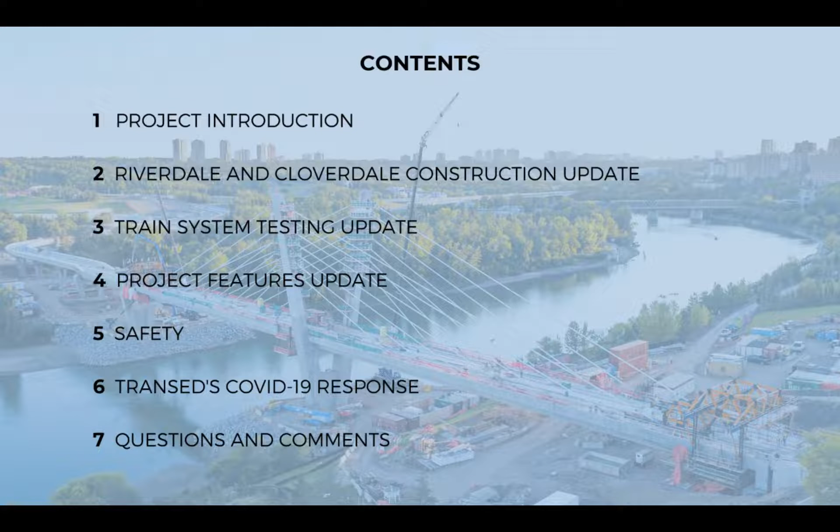The contents of today's presentation: a brief introduction of the project, then we'll focus in on the Riverdale and Cloverdale construction updates in and around those neighborhoods. We'll take you through some train system updates, which Eric will lead, and then I'll walk you through a number of other project features along the entire alignment of the LRT. We'll focus a bit on safety, how that impacts the public, as well as some of our COVID-19 response. As Isabel mentioned, you can submit questions throughout the presentation, and Eric and myself, along with some assistance from the city who's joining us today, will do our best to answer those questions. We do have representation from the city available to answer questions, and they are listening in today as well.

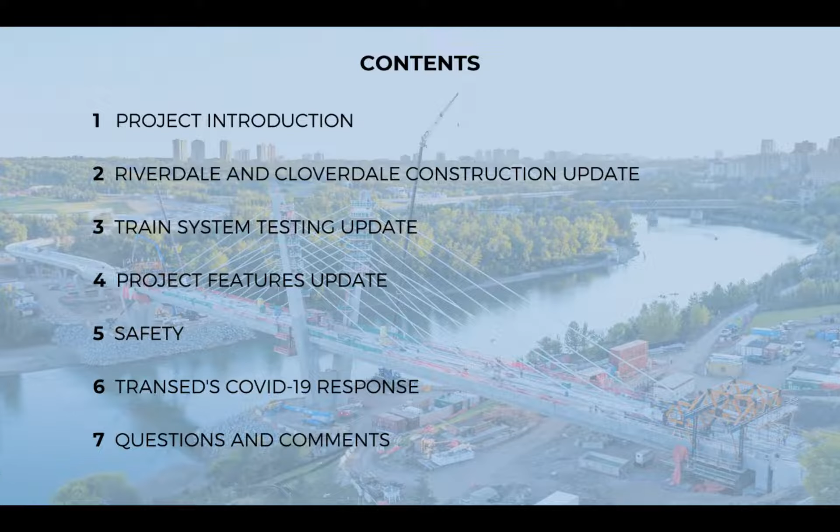So with that, we will move right into the project introduction. Before I do that, I want to talk a little bit about what you see on your screen right now - if you want to just go back, Isabel, for a second.

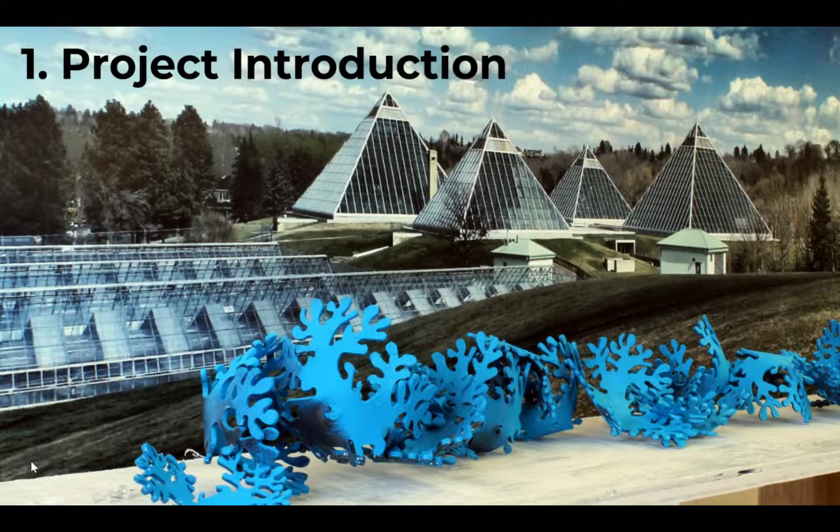This is some public art rendering from down in the Muttart area - artist work that's going to be mounted on top of the stop at the Muttart station, down at the bottom of Muttart Park basically. This art was created by Stephanie Johnson; she is doing botanically themed sculptures that will echo plants and flowers found at the Muttart Conservatory. What I find really interesting is that it was actually derived from imagery provided to her by members of the community who were in the Muttart - they created sketches of the different plants and species they saw inside, and she's taken those and used them to help influence the sculptures she's making. Really, really neat - it looks similar to this. I saw some recent photos of it today, and I can tell you it's very, very similar to what you see in the rendering here.

All right, now we'll move right into a couple updates and information pieces about what this Valley Line project is all about.

This is a public-private partnership, also known as a P3, the first of its kind for the city of Edmonton. It's the southeast portion, with another phase coming that'll take the line out to the west. This portion that TransEd is building is 13 kilometers long, taking us from downtown Edmonton all the way to Mill Woods, at about 66th Street and 28th Avenue. Along that route, there are 11 train stops, which we'll talk about in detail throughout the presentation. There's also one elevated, fairly significant station along the alignment, incorporated with a 1,300 stall park and ride, an ETS bus transit facility, taxi stations, kiss and ride, and other transit-oriented parking.

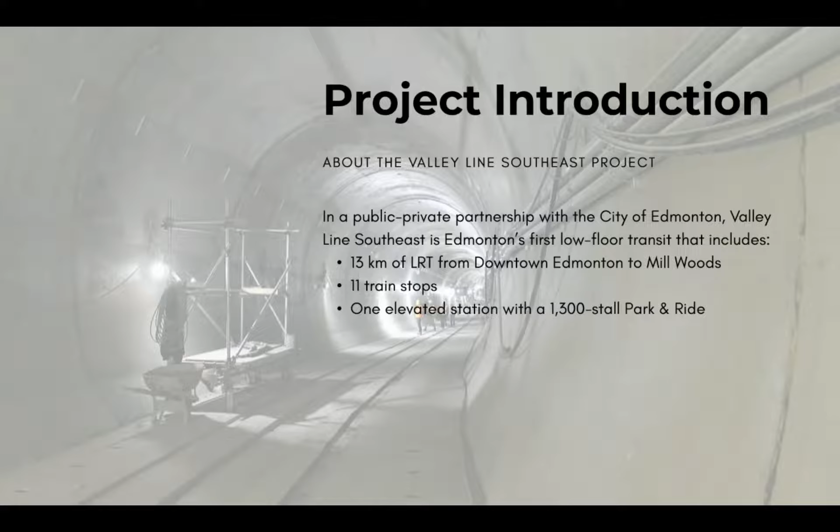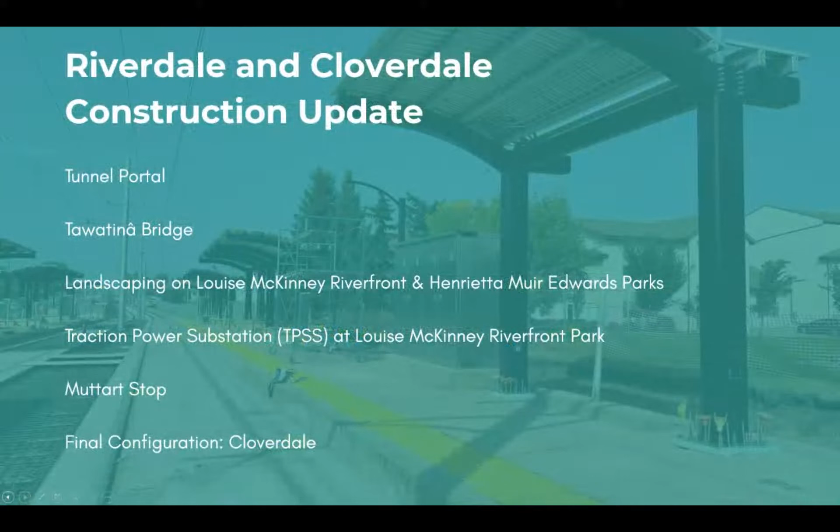Moving on, I'm going to dive right into the Riverdale and Cloverdale construction update. I know a lot of you have called in from that neighborhood, and we're really grateful for that. Some really good participation from that community. You've certainly broken the record for the number of people calling in today compared to some of the other areas we've had along the alignment, so we thank you for that.

Some of the things I'm going to cover here with some help from Eric is the tunnel portal. I'll talk a little about the Tawatinâ Bridge, which is the bridge crossing the river, and take you through some of the landscaping in Louise McKinney Riverfront and Henrietta Muir Edwards Parks. We'll talk about the traction power substation located on the North Riverbank, I'll give you some more details about the Muttart stop, and then show you a bit of the final configuration drawings to give you a big overview map of the area.

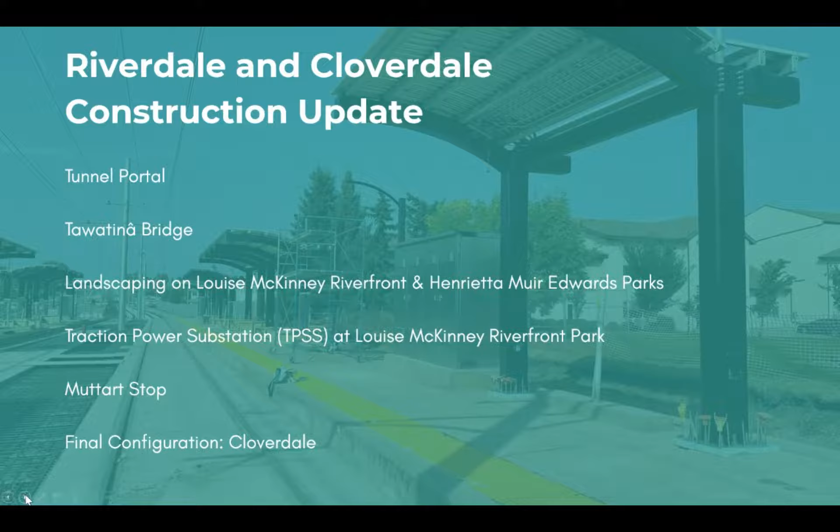All right, so what you're looking at right now is the tunnel portal. The big picture on the left is looking down the tunnel. This was taken at the very east end of 102nd Avenue, basically where it crosses Jasper Avenue. In fact, right above this photo is Jasper Avenue. You can see in this photo it's very close to completion.

Those devices wrapped in plastic along the outsides of the photo are actually the fans that help move air through the tunnels. You can see there are two, one for the inbound track and one for the outbound. In the bottom right photo, you can see a shot down the tunnel, where you can note that the track is being installed. There are conduits along the side, so a lot of the systems and cabling infrastructure is going into the tunnel right now as well, well underway. We're very close to completing the tunnel. In the top right photo, you can see the tracks coming out of the portal on the riverbank side, on the north riverbank of the river, just as it connects to the Tawatinâ Bridge. Fairly recent photograph, that one there as well.

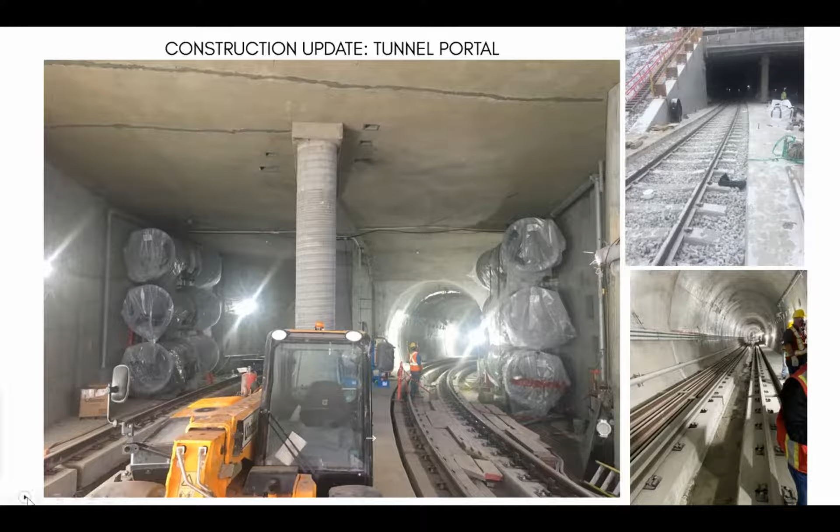Those concrete plinths are what actually carry the steel rail across the bridge. That work is actively ongoing right now. In fact, we'll finish that concrete work in the coming weeks, and then we'll move quickly into the rail installation. That allows us to begin putting up the overhead catenary system across the bridge, and you'll see that occurring through the winter.

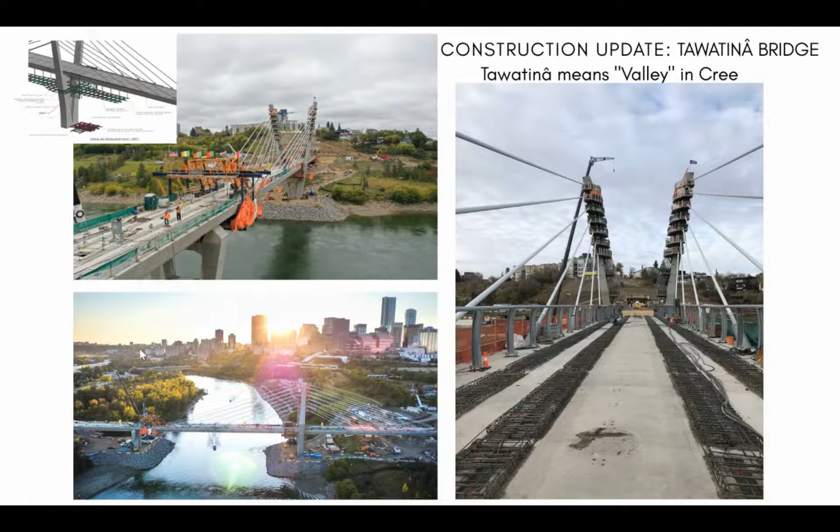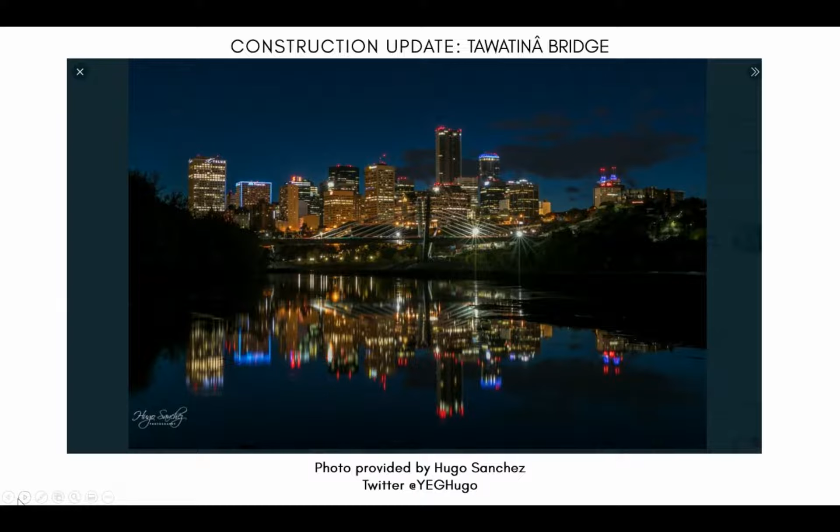All right, so let's talk a little bit more about the landscaping that's going to occur in the river valley. I know a lot of you are probably pretty interested in that. To start out with, on the Louise McKinney side, the north side, there are 42 different species of trees and shrubs that will be installed in that area, and 26 different kinds of roses, believe it or not. In total, about 2,855 plants are being installed in the landscaping areas of that side of the river.

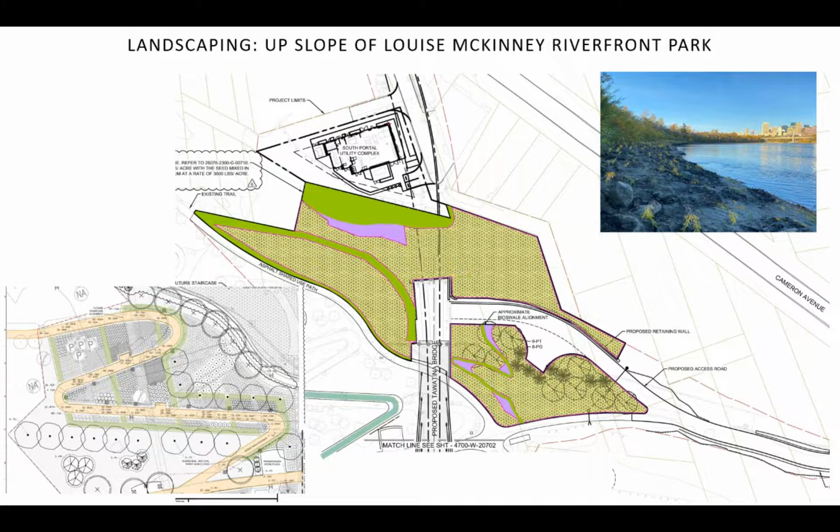We often get asked why we go so far down the river to do that work instead of just doing it where the bridge is. When you put a river berm into the river, there's a certain amount of disturbance to fish habitat and the riverbed at that location. As compensation, Alberta Environment requires contractors like ourselves to do an offsetting plan - additional planting back where the berm is, happening next spring, plus further areas to give an equivalent and more than equivalent footprint of reestablished fish habitat and biodiversity improvements. That work is ongoing right now and will continue next spring.

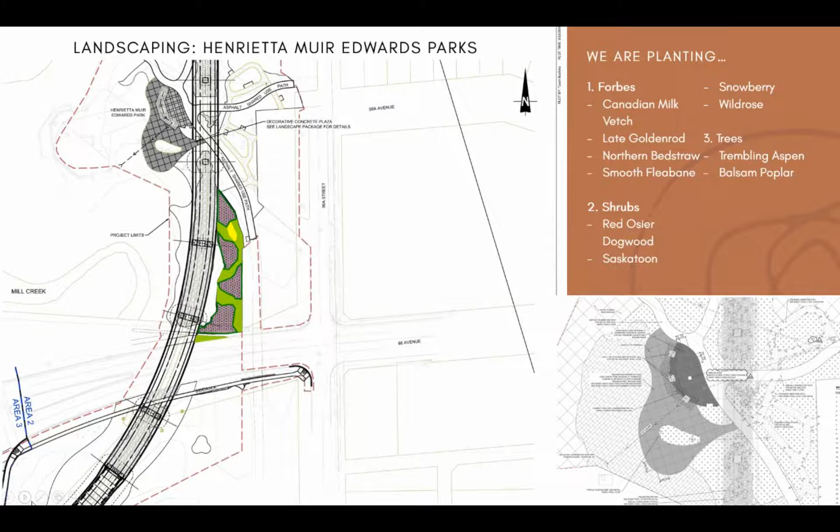Jumping to the other side of the river now, you can see a list of all the different forbs, shrubs and trees going into the Henrietta Muir side, the south side of the river. Not a lot different to speak about with the plants - take a look at the list, again many hundreds of plants get installed there. The parks will be reestablished, the trail system that was down there before will be put back into place, and the connections to the existing pedestrian bridge over 98th Avenue will be reconnected. All of that happens next spring as well.

I wanted to talk about one other topic before we move off this slide - the reforestation efforts for the entire project, specific to the river valley. Across the entire project there's just under 11,000 trees being planted, and 86,000 shrubs across the entire alignment. In areas of the river valley where forest was removed to complete our work, we have to restore that, so we have a very detailed reforestation plan reviewed by the city and the city's environmental professionals, and developed by environmental scientists and consultants on our side.

One unique aspect of that reforestation plan started a few years ago - we sent our crews out into the river valley to gather seeds, and we've been growing native plant seeds from the river valley for the last few seasons in greenhouses. Those are going to be transplanted from the greenhouses into the reforestation areas within the river valley, designed to mimic exactly what was there before. We're pretty proud of that effort.

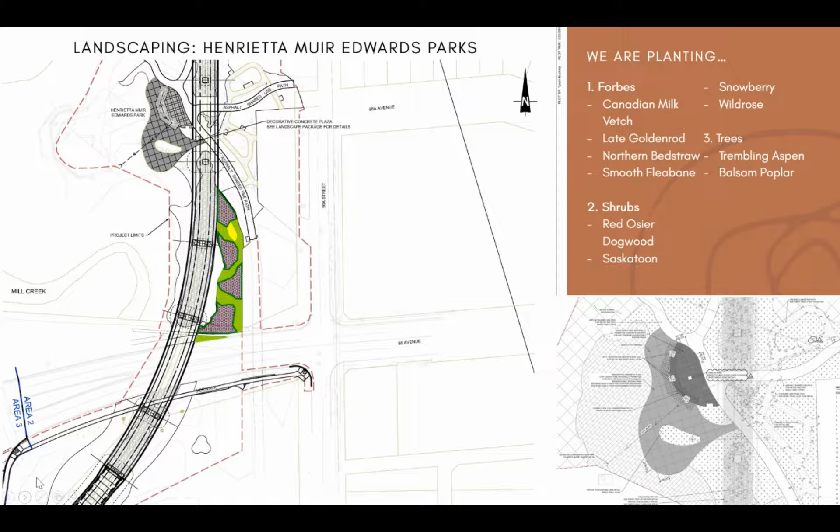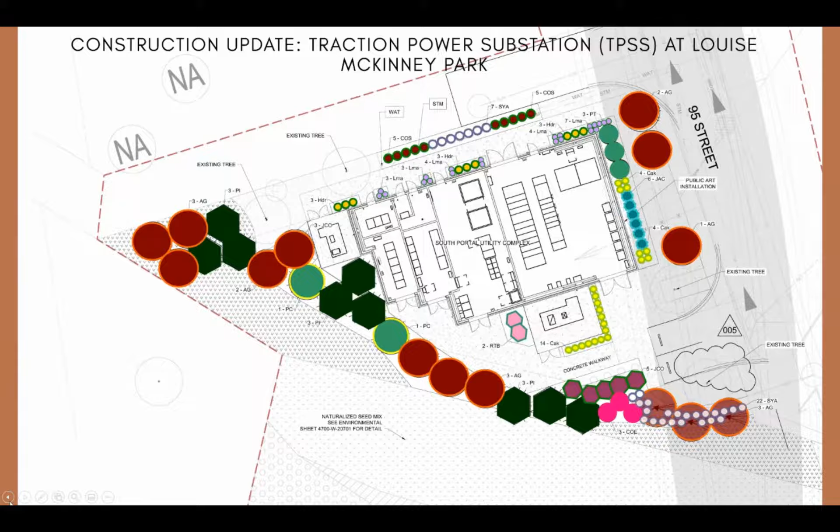All right, we can move on.

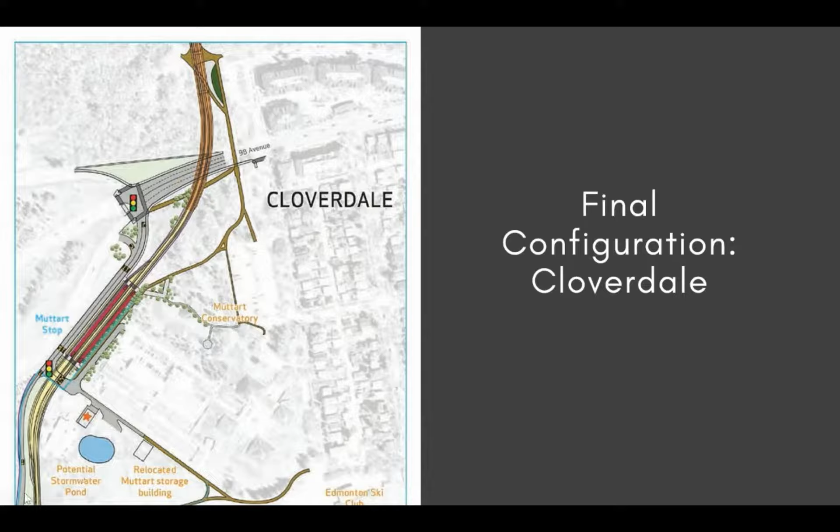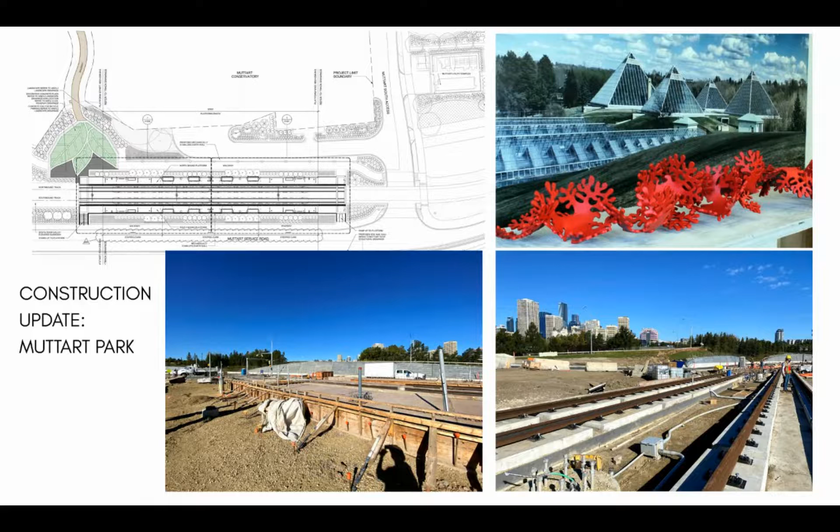All right, let's keep moving. I'm going to turn it over now to Eric to give you a little bit of an update on the train system testing.

Thank you, Dallas. So let's go to the next slide and dive right into it. I wanted to give everybody a view of what happens when the trains are actually delivered. Right now we've got more than half the fleet that's actually arrived in Edmonton - really, really proud about that. It's coming all the way from Kingston where they're built and tested.

It gets loaded in Kingston at the manufacturing facility, so it's being rolled on. Then after that, it gets trained all the way to Edmonton and to the main yard. After that, it gets transferred onto that truck, which is really a specialized truck to allow us to take the different curves and navigate the city streets.

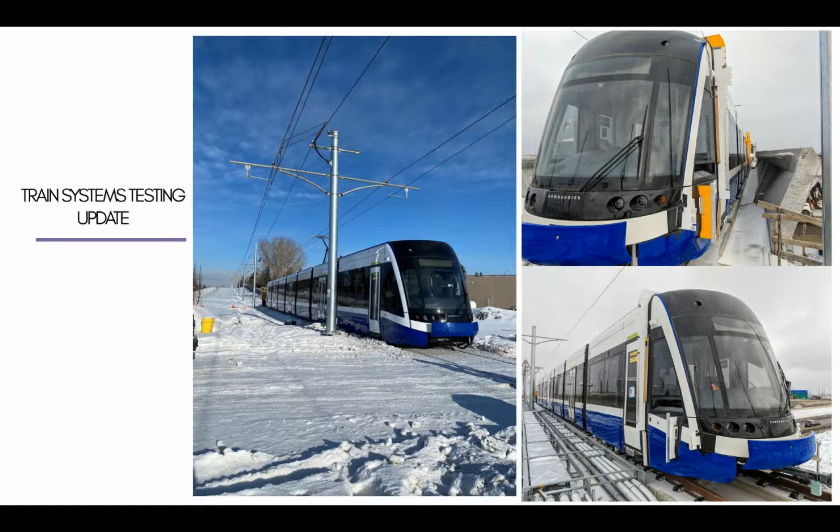Really, really interesting stuff. You should start seeing things in your area probably in the course of next year. For this year, we'll be operating in dynamic mode around 66th Street and the area of 38th and so on, and we'll make our way gradually down the alignment toward the city downtown core.

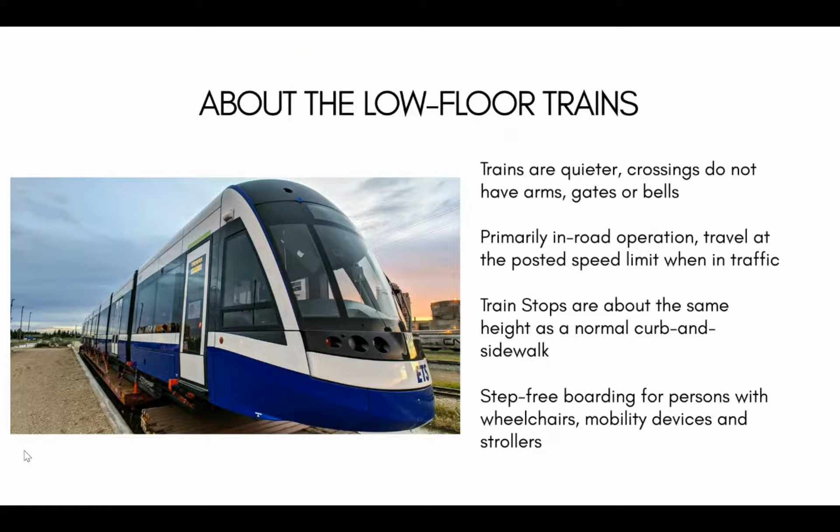That's basically going to be quite exciting, what we're going to see in the next months to come. So next... yeah, go ahead. Onto me? Yes, Eric.

One thing you might have forgotten to mention is about train number 19. Oh yeah, that's true — train number 19 just came in on its way, and it's arrived, and we have another two trains on their way right now. We're really excited to see them coming in. Very soon we'll have all the trains in Edmonton. We're expecting all 26 to be completed by the end of the year, and if not all of them in Edmonton by the end of the year, it's going to be really soon. I'm actually looking forward to my Christmas present of unpacking that last train coming into Edmonton. That's going to be a really great time.

So thank you for that, Isabelle, and for reminding me. No problem, back to you. Thank you, yes, it's an exciting time. I'm sure some people on the call might have seen some of the trains when they're driving.

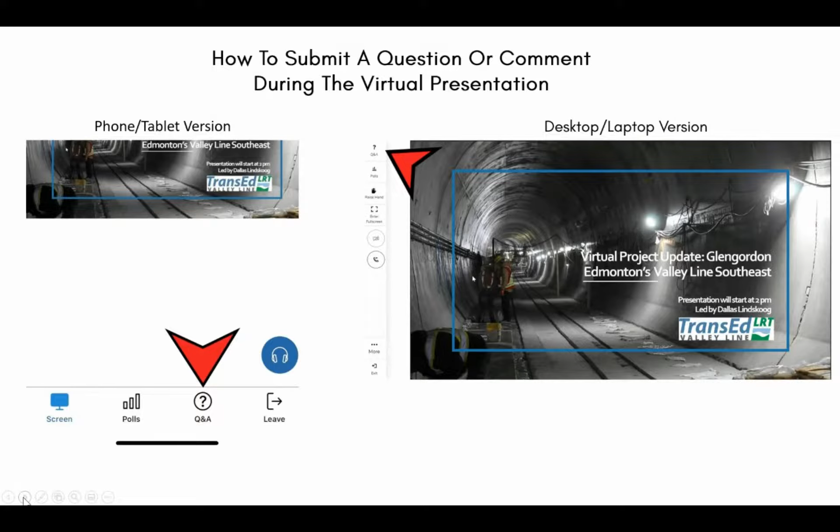Thanks, Isabelle, and thanks, Eric. That was a great summary of the important work that our partners Bombardier are doing with the trains and the testing. Really thankful for that. All right, I'm going to take you now through some of the project features along the alignment. We're going to work our way from the downtown area south, and I'll talk about a number of locations until we get down to the Mill Woods area.

Starting off, these are some photos of 102nd Avenue. The LRT alignment in this phase of construction extends from 95th Street near Jasper Avenue all the way to 103rd Street. What I find really interesting about the downtown corridor is that we aren't doing much paving with asphalt. The surface of the road, as you see in this photo, and the sidewalks are constructed out of paving stones, done with architectural patterning and very distinctive, intentional coloring.

You can't see in the photos here, but some of that work is going to happen next year — planting beds and amenity areas. There'll be a lot of fairly fancy bench work and various vegetation along the alignment, far more than what used to be there, and also some additional street lighting through downtown.

So it's going to look really fantastic.

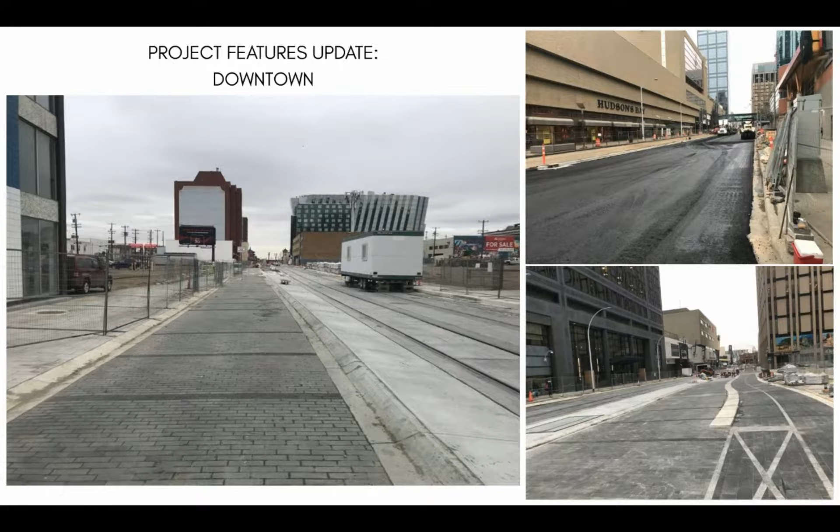One thing I want to point out about the downtown area is we are working hard to open up certain areas of it to unimpeded pedestrian access, and that will occur in the coming weeks, but it will not open to vehicular travel through the winter. You won't see that happen until next year when we're in a position to start commissioning the trains in conjunction with the traffic signals. But you will have free and really good access, improved from the good access you have right now, for pedestrians through the winter.

It has a fairly significant feature on the far east end as well, which will be constructed in the coming months. I also like to give a big shout out to our stakeholders in that area who have been very accommodating as we came in and needed to close off access along the street here in order to build the paving stones. It certainly wasn't easy for them, but we're very grateful for their cooperation in allowing us to do that.

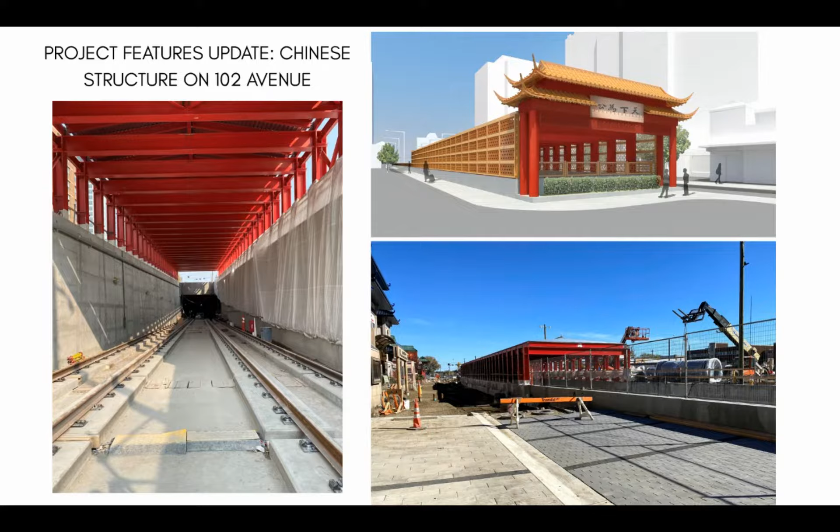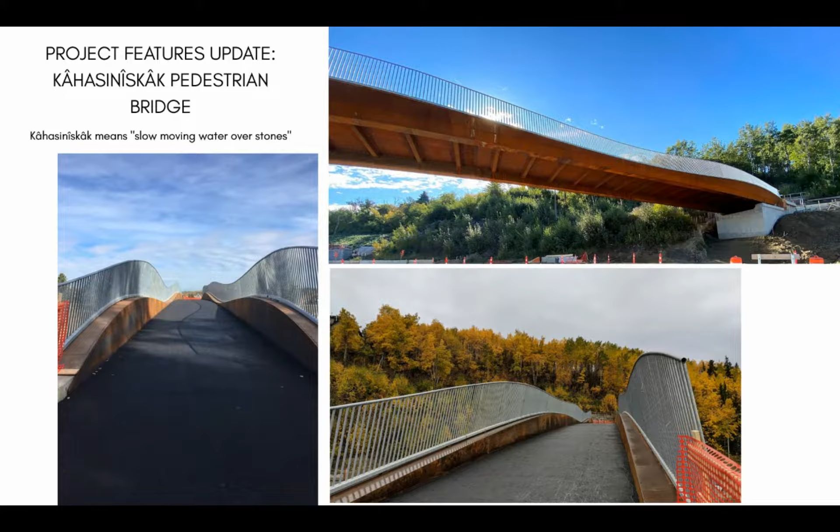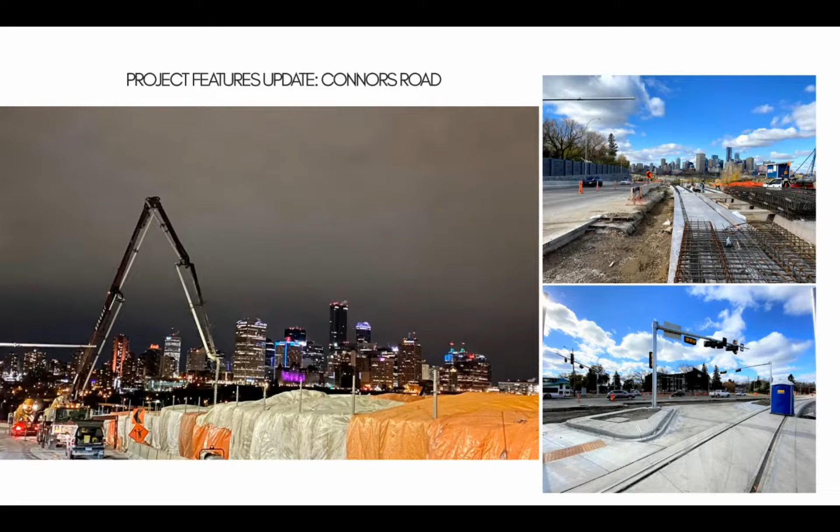Now, I'm sure a lot of you are from this neighborhood, wondering when Cloverdale Road will open. I can tell you that's about 2 weeks behind this opening, so roughly 2 to 3 weeks. Reminder that will be a one-way direction down the hill, heading north. What has to happen in the next couple of weeks is the last sidewalk connection - if the weather cooperates, we will have the permanent sidewalks installed between Strathearn Drive and Cloverdale, the last little area that needs sidewalks. If the weather doesn't cooperate, we may have to put a temporary sidewalk in there until spring. But we will have that road open within a few weeks.

Moving a little bit further now down 95th Avenue, a couple things I wanted to point out here - first of all, there are still a little bit of concrete pours ongoing down the middle of the trackway.

That work is ongoing for the next couple of weeks, and you should see that happen during the daytime. Fairly minor concrete pours, but it's really just the last of the track concrete infills, as we call them. That'll be occurring in the coming weeks.

On the east end of 95th Avenue at the intersection of 95th and 85th, we are just days away from one more traffic flip down there. We call it a traffic flip when we move traffic from one configuration to another. The lane configuration that will be there ultimately will be implemented when that traffic flip occurs. The lanes may shift slightly, but the number of lanes and turning lanes will come into effect in a couple of weeks.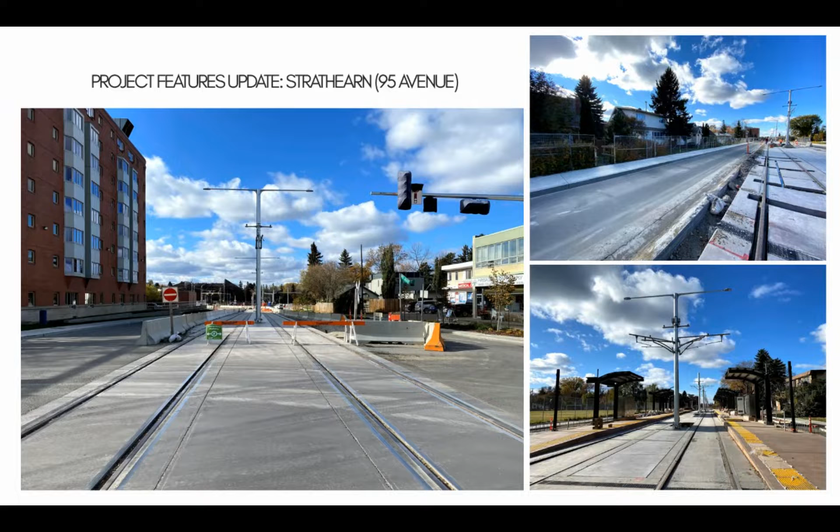That really is a theme I can tell you along the entire alignment. We have a great deal of traffic flips we've been doing, as I'm sure you've seen in the last few years, and we're nearing the end of that. There's a lot of infrastructure to do with traffic signals being installed lately, and those require little flips back and forth, sometimes just to move a lane over to get that last signal light pole foundation drilled and concrete poured, or even just the last pedestrian push button installed. That can be just one traffic flip to accomplish. So all along the alignment, that work is occurring between now and the very end of November. I'll speak in more detail about that in a few locations as we go through these slides.

We're moving now down to Argyle Road and 83rd Street. We've passed 85th Street and the former traffic circle, which has now been converted into a full intersection, as I'm sure you've noticed if you've driven through there. That is virtually complete. There is a little bit of median concrete to pour on the Connors Road side of that intersection, which will occur in the next few weeks. The intent by the end of November is to have all of the lanes fully opened to their ultimate configuration, meaning if you're traveling northbound and want to turn left onto Connors Road, the two dedicated left turn bays will open up in a couple of weeks.

This area down by Argyle, just a quick note - on the photo on the left, that is the northbound lanes. There is one more lift of asphalt that won't be paved until next year. That's the last top lift of paving along 83rd Street, all the way from Argyle to 82nd Avenue. So that area of road work is virtually complete.

One thing to note: in the coming couple of months, you'll see us installing piles for a retaining wall at 69A Avenue on the southbound side of 83rd Street, just north of Argyle Road. There's one small retaining wall that has to get built there as well, occurring in the coming few months. The lanes of traffic, though, will remain open on the southbound side.

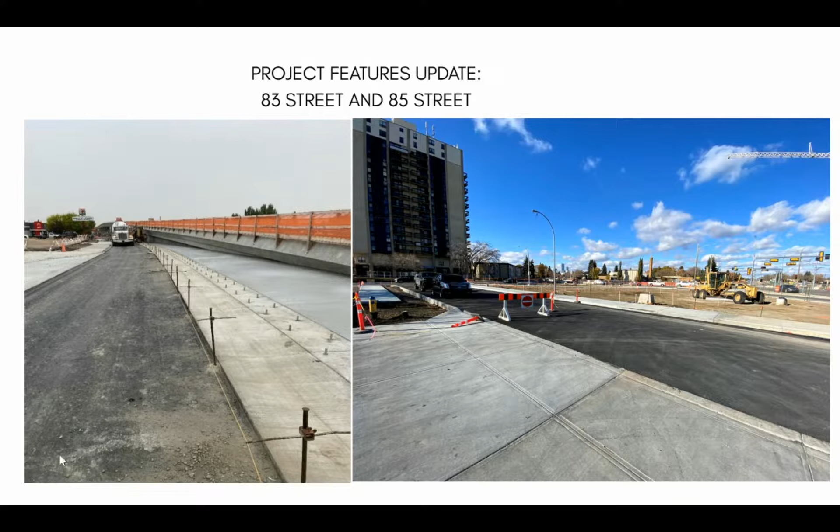Moving a little further now, past Argyle Road, we've entered the elevated guideway portion of the alignment. This is a 1.2 kilometer portion of track raised above Argyle Road and 75th Street, as well as over top of two railways and Wagner Park. You can see the station here being constructed.

It's well underway - we're at the stage now where we're installing the glass around the buildings. You can see from the photo on the bottom left that the inside of the station is virtually complete. In fact, we just poured the topping concrete last week - it's a colored concrete on top of the platform. You can also see that the beautiful wood roof is complete. That roof is constructed out of individual pieces of lumber, individually stained and nailed into place - many, many thousands of them.

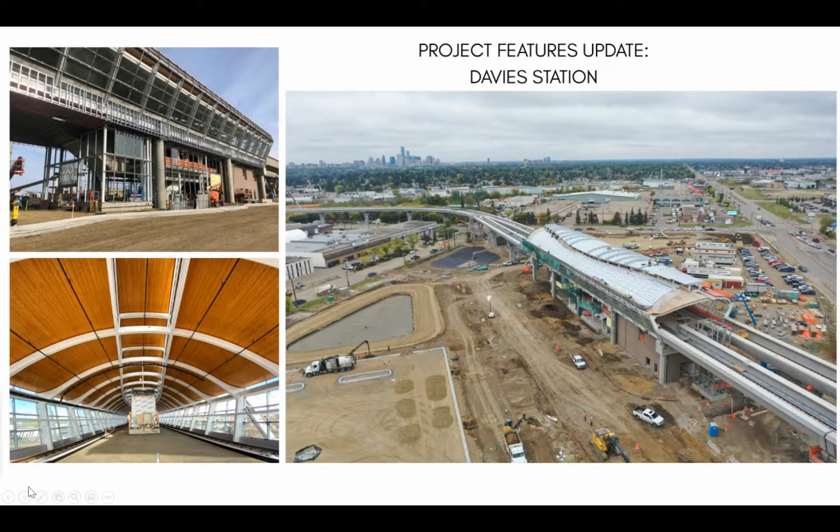Also of note, on the photo on the right, you can see the park and ride facility I mentioned at the beginning of the presentation coming to life - that's the 1,300 stall parking lot we talked about. In and around that - there's a great picture of it right there - we're in the midst of putting in the curbs and paving right now. It'll be close to completion this fall but will carry over into next spring. On the photo on the left, those are the bus bays for the transit center surrounding the Davies Station.

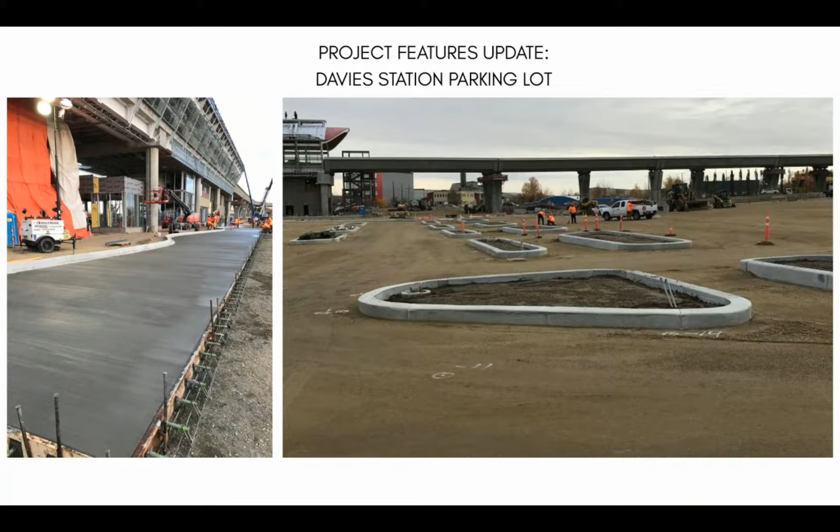Yeah, it was Mary talking to the mute button. I guess that's the new features now of having those webinars.

Guys, it's really an amazing facility. We're able to store all the 26 trains within this facility. So you see the green doors. This is really the maintenance part of the facility, where we can do the regular, scheduled maintenance for the trains and any of the things that we have to resolve with the equipment.

And then you see the longer part of the building. That's on the back end near Whitemud, which you see going across there on the right hand picture. So that very long part of the building is the storage stabling area. This is where we bring all the vehicles to bed at night, keep them warm and cozy for everybody while saving on energy, getting them shielded from the wind and everything.

But no, they can sleep outside, they don't mind that. They're made and designed for the winter. But we want to make sure that when we get those vehicles out and about, we can do that swiftly and without delay.

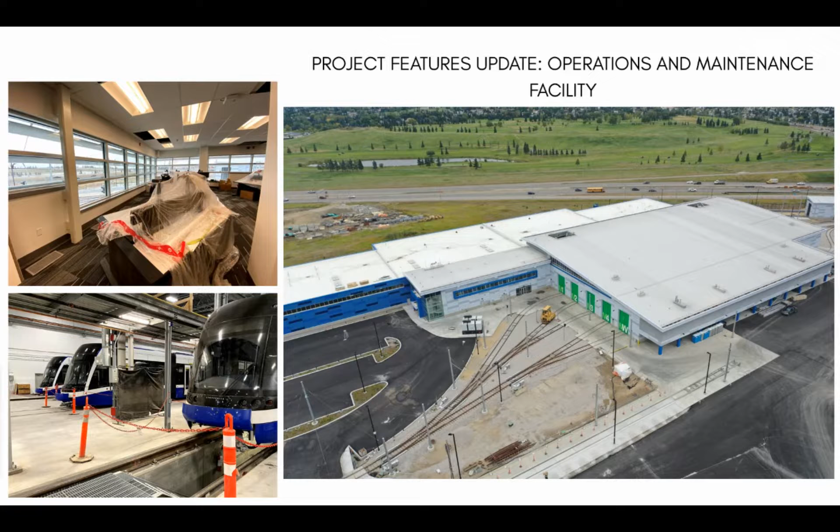So really quite exciting to see how this is coming true and coming together. People are really hoping to get into that building, and as we're going, we're mobilizing the people that will support that system and its operation. Really, really exciting, and it's a really nice building and very well done. Really, really appreciate it. Next picture.

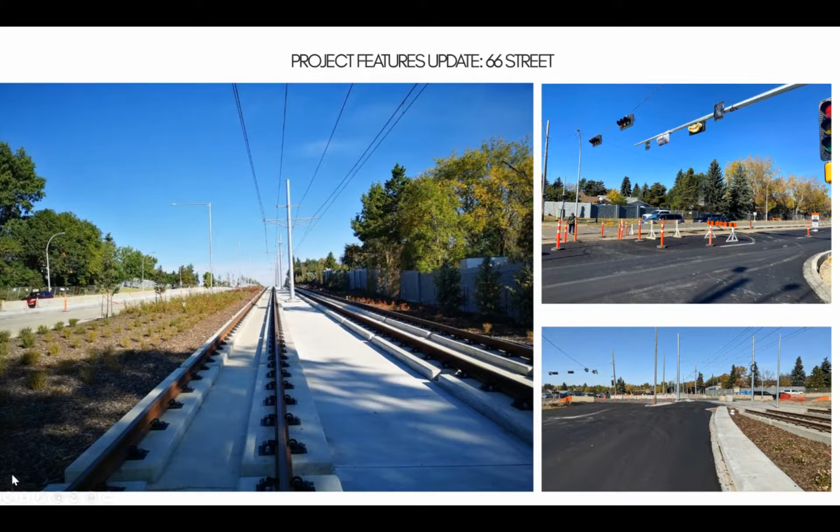Moving on now to the next slide, I want to talk a little bit about the LRT train stops and some of their features. As Eric has already mentioned, the systems installations are ongoing. A lot of that work isn't really seen, but it's very much integral to the stage we're at right now, which is moving right into a testing and commissioning stage.

The other thing I want to point out about our stops is a little bit about their orientation. In some cases, the stop platform is on the outside of the track, and in some cases it's between the tracks. Also, in the middle of the roadway, on the outside of the roadway, there are a number of different configurations. So just something to point out - it depends on the neighborhood that you're in.

The design has been done in such a way that the features incorporated into the sidewalk help the pedestrian have a visual cue of where to walk to get to a platform. When you get near our stops, you're entering a pedestrian priority zone. In those zones, our design incorporates colored concrete for sidewalks to help give that visual representation. You'll also see a lot of those yellow tactile strips, the little bumpy, knobby things that help the visually impaired feel where the edge of a platform is, or where they might be stepping beyond a sidewalk and into live traffic. Those are additional cues for pedestrians to help navigate getting to a stop. I think you'll find it very easy to navigate as a pedestrian along this alignment. It's very integrated into the design.

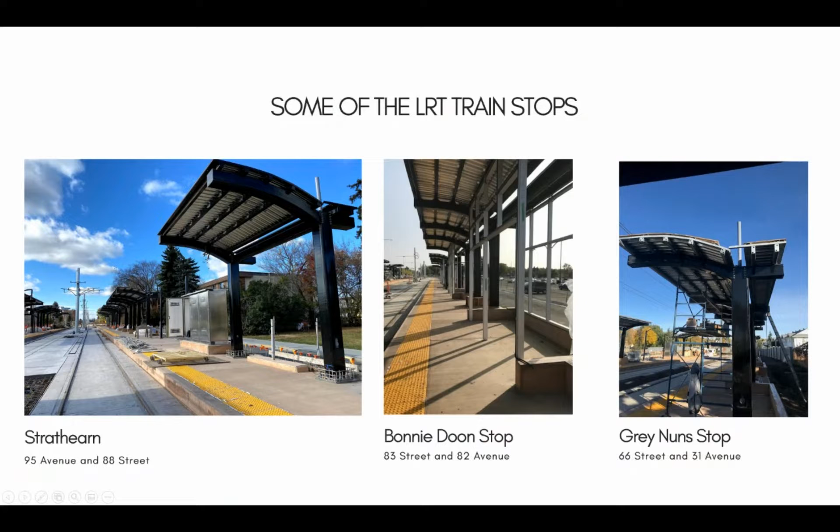You'll also note along a lot of our stops, the shelters being constructed. You can see some of the steel work going up in the right photo. You'll start to see some of the glass being installed on that in the coming weeks and months as well. I should also note those stops, or rather the shelters, will be heated as well, which is unique to the Valley Line.

Please follow either a fully constructed sidewalk that is obviously brand new and meant for travel, or follow our designated signs. Now, when it comes to vehicle traffic, two things. I've mentioned a few times now that the traffic signals are being installed and coming online. You'll see new signal signs along the alignment as well, just to remind you that something has changed at the intersection you're approaching. Like any other intersection in the city, simply follow the rules of the road and you will remain safe. Nothing really fancy to note, other than you're going to see some of our temporary signals supported by wires turn off, and the new signals that are currently bagged with black covers, those covers will be removed and the new signals will come online. Please just follow them like any other signal.

Now, Eric has talked about testing. That'll happen over the coming months as well. As trains begin to enter new neighborhoods, and as that testing occurs, you will start to see these new train testing signs pop up. A lot of those will be mounted onto sandwich boards, and we'll place those near pedestrian walkways primarily, just to make sure the public is aware that area is active for train movements. It's very important that the public understand that we don't want you walking on the track. It may look like a sidewalk or an easy way to get from point A to point B, but we absolutely need you to stay on the designated walkways as they're signed, or on the obvious sidewalks that are either colored or the typical gray concrete sidewalks. Please do not walk along our trackway.

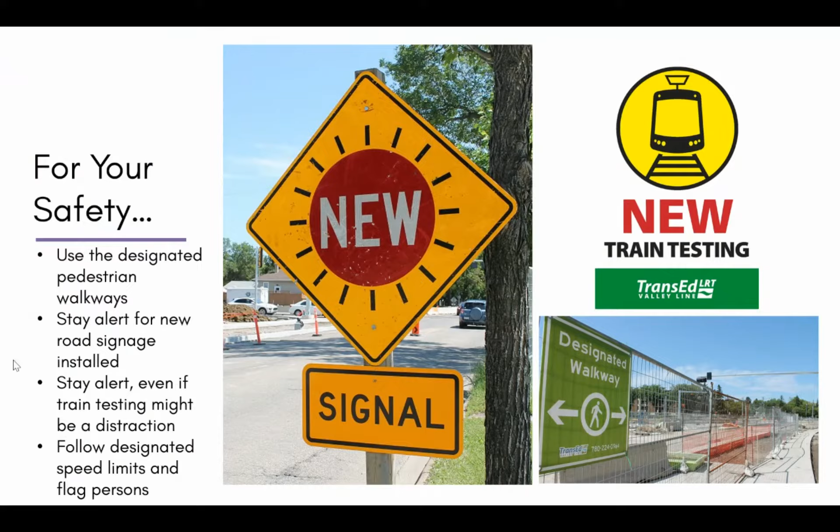Obviously, something I'd like to talk about is the COVID-19 response that TransEd has taken since the beginning of the pandemic. It hasn't been easy. It's absolutely not been easy for anyone. Of course, you all know that. I have to, though, take a moment and just say a huge thank you to our workforce.

These men and women have worked tirelessly to advance the project as best as they possibly could, while having to take measures that are not exactly normal for them. Wearing a mask may be more common to a construction worker than the average person, but having to wear a mask all the time in hot weather, often by yourself, is not something they're familiar with. I have to give them a lot of kudos for going the extra mile to keep our industry functioning, keep this project moving, and ultimately benefit the city. So thank you to them.

There's been a tremendous amount of additional cleaning done on the project. We have a total of 13 crews dedicated just to cleaning washrooms, lunchrooms, office facilities, you name it. Any touch surface along the alignment has been cleaned rigorously through the course of the summer. In addition, we brought on additional nursing staff just to be eyes and ears and a resource of information to our crews. So a big thank you to that group as well.

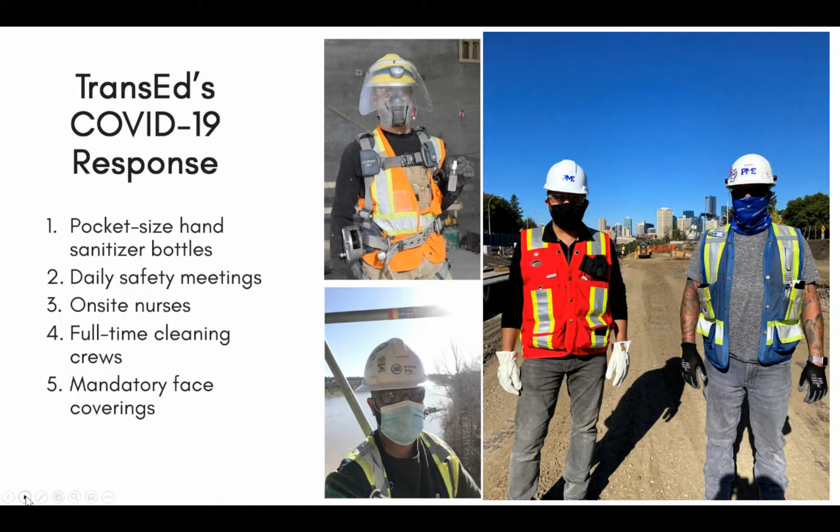Thanks, Dallas and Eric, for taking us through that and through the alignment and all the construction updates. We've had quite a number of questions that have come through, so if we aren't able to get through your questions, please know that we will send you an email from the comms team just to answer exactly what you asked here. So to dive in, the first question is for Dallas.

Could you please speak a little bit to the lighting plan for the Tawatinâ Bridge? Yes, absolutely. There are lights that will be installed - nothing too significant, nothing quite like the Walterdale or the High Level, but there is SUP lighting along the hand railing, that underslung path that hangs underneath the bridge, which has lighting built into it as well. The tower also gets lit up - that's a bit of a feature - and from that, each light sheds onto those stays, the 7 cables that come off the bridge. So it will glow fairly similar to the rendering we saw from Hugo earlier in the presentation. A lot of the lighting on the cables right now is from our construction work, but there are lights mounted on the bridge that will also help give that feature in the future.

Thanks, Dallas. And for Eric, a question for you. A question did come in on what kind of, I guess, tractors or something, in case there's a train that breaks down at any point - which we anticipate won't happen - is there something that's going to push or pull the train back to the operations and maintenance facility? If you could speak to that.